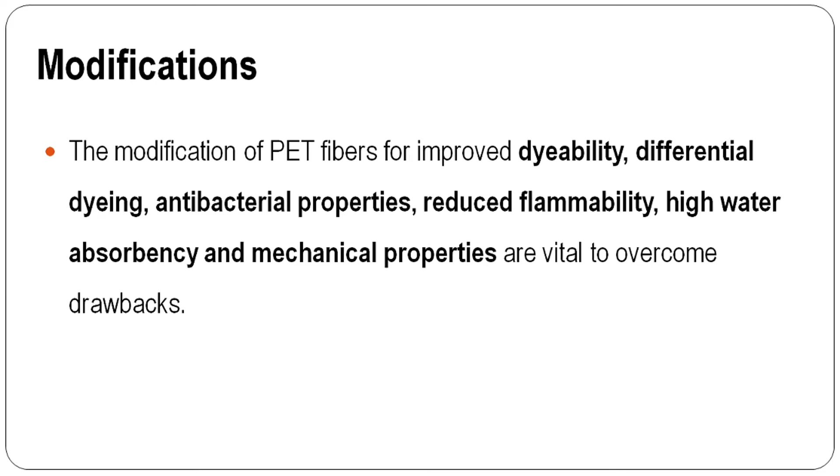improve some mechanical properties. So it is possible to modify it so that we can get these properties. Therefore, once we get these properties as per the applications, we are fully satisfied. Let's see what kind of modifications normally take place for polyethylene terephthalate.

The first one is a change in the chemical composition of the polyethylene terephthalate molecule by introducing a third or fourth component into the polymer chain during polymerization. Some comonomers or some functional groups, those things we can add during polymerization.

Second, use certain additives like fillers or pigments of polymers which change the functionality of the fibers in the melt phase prior to extrusion. The third one is modification during melt spinning, such as hollow or microdenier fibers. During production of the filament or fiber form, we change how we are going to manufacture, which I am going to discuss.

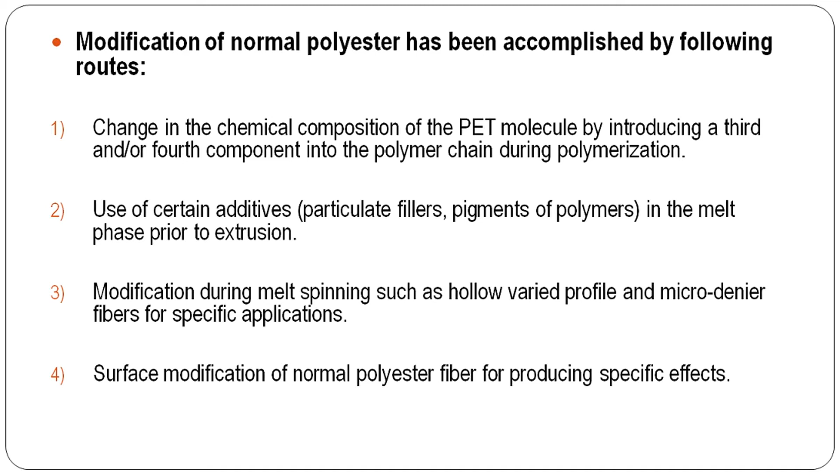The fourth one is surface modification of polyester using some specific effects, by using plasma treatment or enzymatic treatment or some other chemical treatments. This fourth one is after production. The first, second and third ones are before production of filaments. So this way it's possible to do some modification in polyethylene terephthalate. Let's go into the subject.

The first one, modification to improve dyeability. Generally we all know that polyester is very difficult to color since it has a higher Tg, and usually people carry out the dyeing with high temperature and high pressure, around 140 degrees Celsius, along with very high pressure, around 3.5 bars, in the case of 100% polyester.

So it's very difficult, and unnecessarily we are spending a lot of energy, and we have to be concerned because of global warming and many factors. So here the first one is improved dyeability by reducing the glass transition temperature, which increases the dyeing rate, because polyester has around 80 to 90 degrees Celsius as a glass transition temperature. Once we reduce this glass transition temperature, it's possible to carry out the dyeing at lower temperature as compared

to 140. The most effective comonomers are aliphatic in character, so we can replace a small proportion of terephthaloyl units with aliphatic dicarboxylic acids such as glutaric or adipic acid. We add these in the structure so that it will reduce the glass transition temperature.

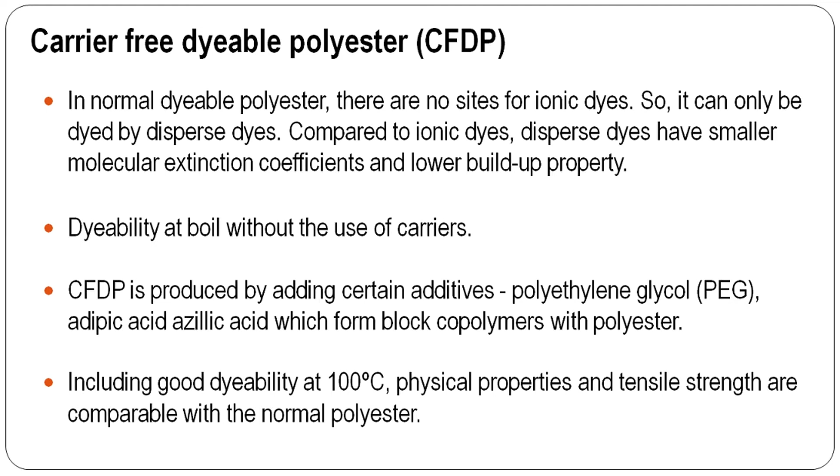Therefore it's possible to dye at 100 degrees centigrade, and by using these agents we make sure that when we add such comonomers or some functional groups, they will not disturb the main properties, primary properties like physical properties and tensile strength and other things. That's more important.

And let's talk about modification for hydrophilicity. Various processes for making polyester fibers hydrophilic include special spinning, non-circular cross-section, multi-layered structures, dyeing, finishing, and plasma treatment. Some of the important modification approaches are discussed below in these sections. By using these techniques, it's possible to increase the hydrophilicity. Basically, polyester absorbs only 0.4 percentage of moisture. So we have to improve. Once we improve it, it will be good when we wear it.

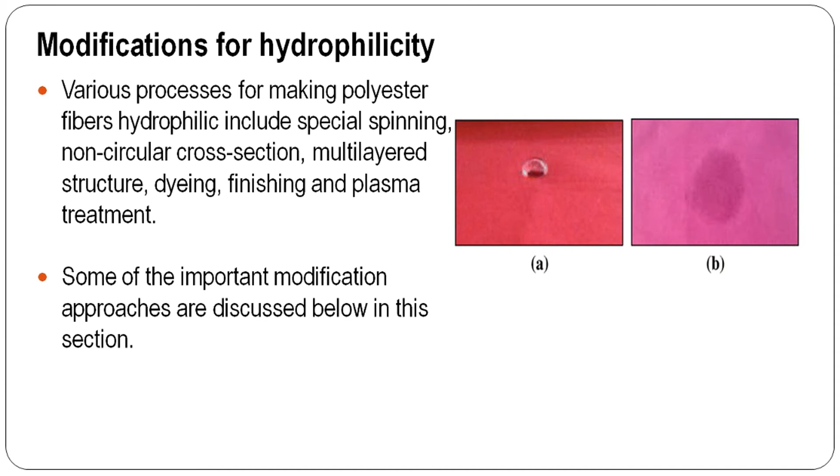So there are some possibilities which increase hydrophilicity, like changing the cross sections to non-circular, like trilobal or some other serrated structure, or 5-star or 8-star structures, and some surface finishing treatment like using plasma. That treatment can help to improve the hydrophilicity.

Also, a large number of additives are suggested for making polyester fiber hydrophilic. ICI company has suggested addition of 5 to 10% weight of sodium sulfate as a slurry in glycol during polymerization, which helps to increase the hydrophilicity. The particle size of sodium sulfate should be less than 3 micron, then only it will be good.

Hollow polyester also increases hydrophilicity to some amount. During the last few years, a considerable amount of research work has been done producing hollow fibers. Hollow is nothing but fibers having small holes in the center of the fiber, or maybe in the side. You can see here different types of hollow fibers. The hollow polyester is produced by using a specially designed spinneret, and normally 4 types of spinnerets are used for producing hollow fibers. You can see here these are all the designs of spinneret.

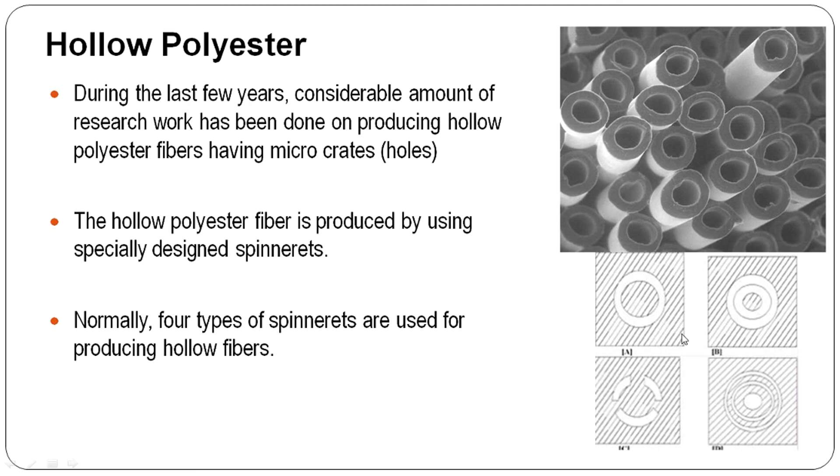Antibacterial polyester modification, providing antibacterial protection. Generally, polyester is a synthetic fiber which doesn't have antibacterial properties like other natural fibers, particularly naturally extracted bamboo. There are two types of bamboo: one is regenerated bamboo and another one is naturally extracted bamboo. The naturally extracted bamboo has antibacterial properties, which polyester doesn't have. So we have to add those properties by using special additives.

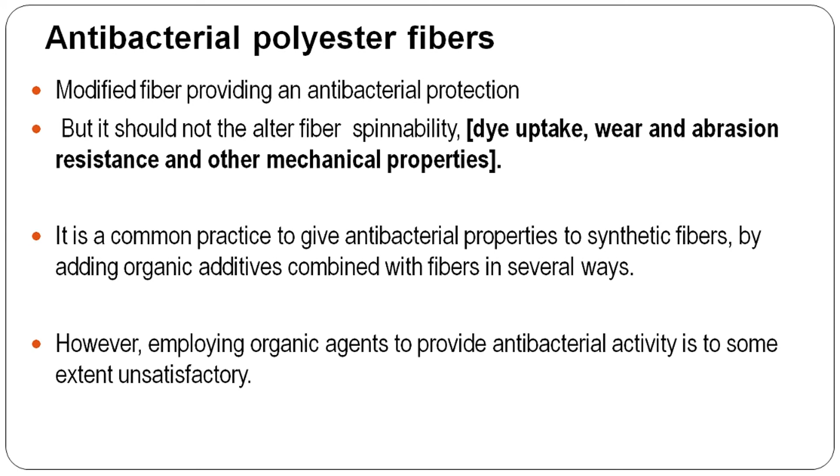It is common practice to give antibacterial properties to synthetic fibers by adding organic additives combined with the fibers in several ways. However, employing organic agents to provide antibacterial activity is to some extent unsatisfactory, because it is still in research and development, not yet successful, maybe at the laboratory level, not commercial.

Next is flame retardant polyester fibers. Generally it is a synthetic fiber having a low limiting oxygen index, so it is necessary to increase the flame resistance by using some additives or some other ways. A number of flame retardant polyester fibers are commercially available. That's more important. Flame retardant additives are used during the transesterification reaction in the polyester, sometimes mixed with the polyester chips before melt spinning. These are some additives which we can use for getting flame retardant polyester.

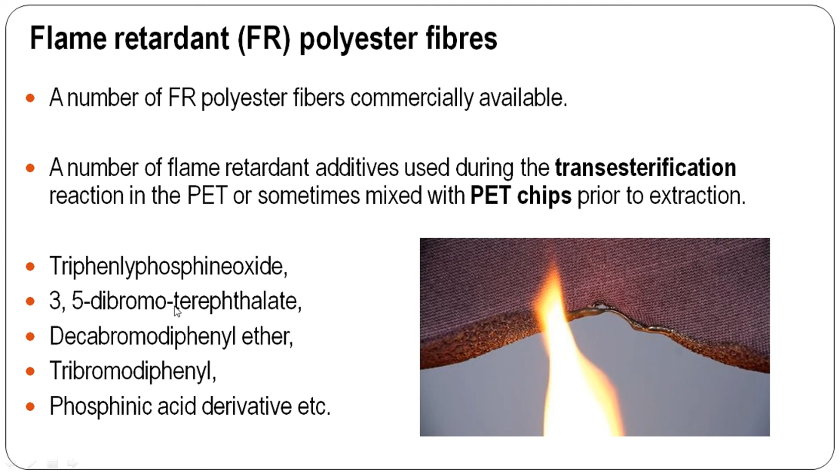Since some additives have problems like environmental impact and toxic nature, inorganic supports such as zeolites and ceramic substrates containing Ag or zinc ions have been proposed for use.

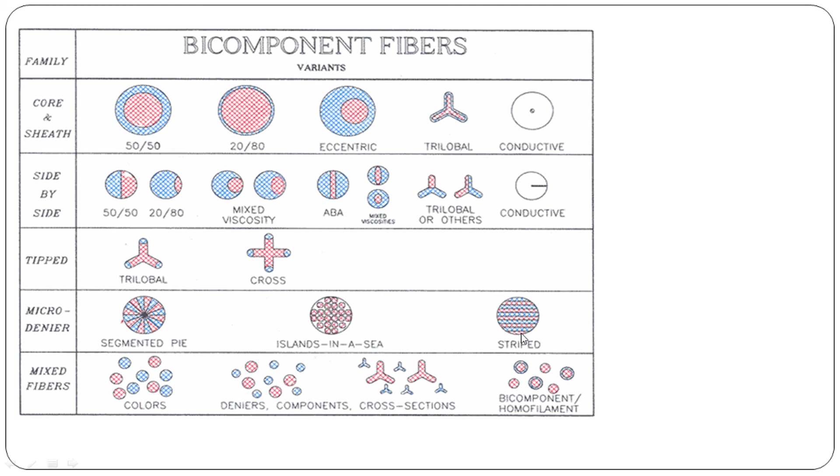What is the advantage of these bicomponent fibers? For example, in a 50/50, it is possible to manufacture nylon inside and polyester outside. So in the same fiber we get both properties, that is the main advantage. According to our applications we can decide what kind of fibers to manufacture. These are types of bicomponent, and you can see the different kinds.

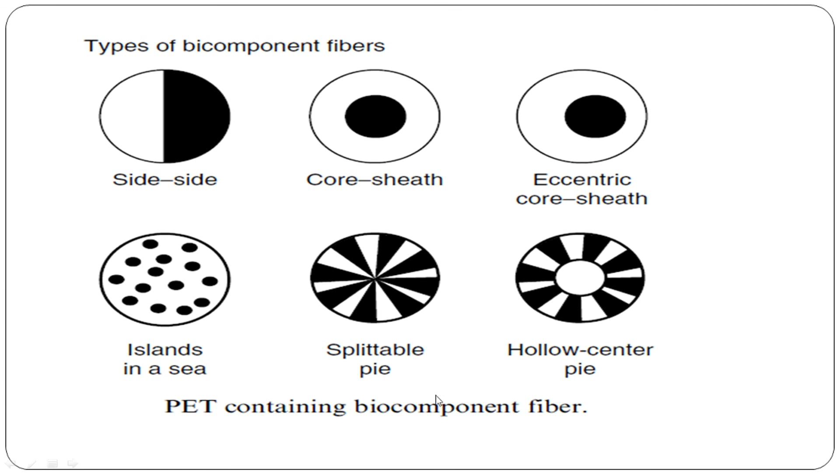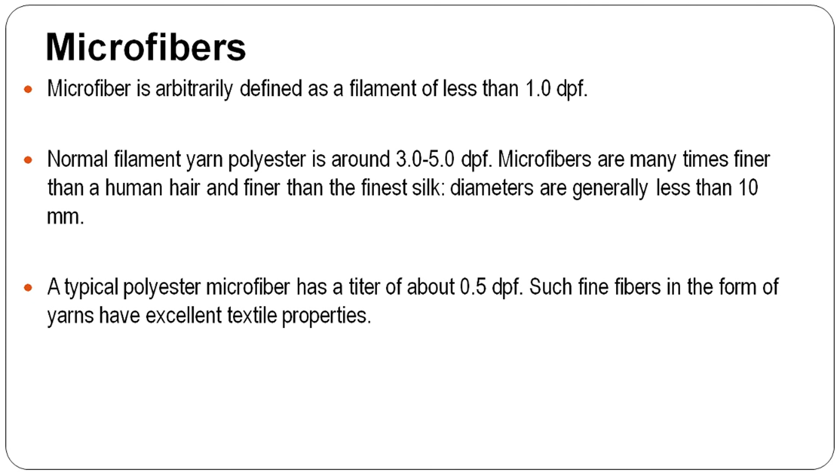Microfibers are fibers with very low denier. The advantage is that microfibers have more surface compared to normal conventional fibers. With more surface, they absorb more water, and for applications like filtration, microfibers have better efficiency than conventional fibers.

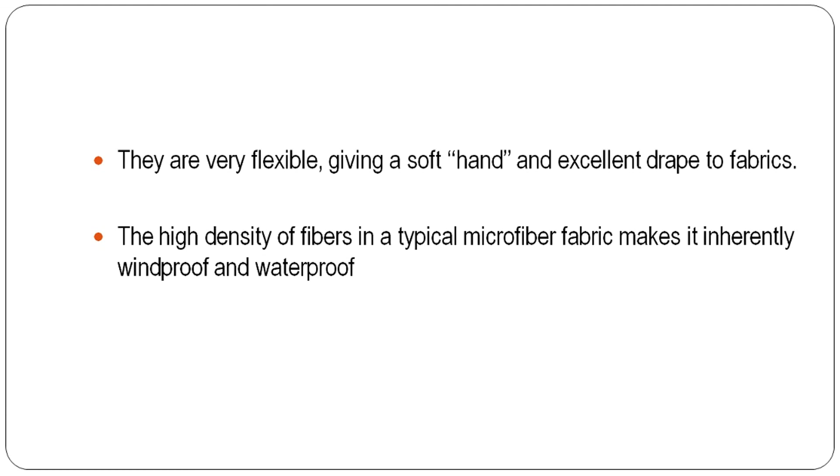They are very flexible, giving soft hand and excellent drape to the fabrics. The high density of fibers in typical microfibers makes the fabric inherently windproof and waterproof, as I said before, because the filtration efficiency is very good here. So these are some modifications of polyester.